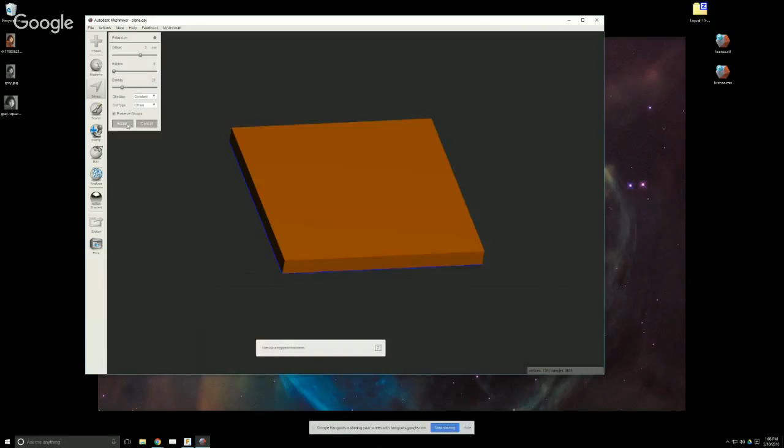So what I want to do is select the whole thing and extrude it out a little bit. If I press W, we don't have very many triangles here. I go over this in the Meshmixer class, but I'm essentially going to remesh this maybe a couple of times to make it really, really dense. The whole point of this is to make a very dense mesh to start off with, which will then have the picture pop out of it.

So I remesh this a couple of times, so that's a pretty dense mesh. That's nice. So we're going to go into here to sculpt, to surface, and let me get rid of these other ones that I did. So we're going to go down here to sculpt, to surface, to stencils, and press the plus button right here, and navigate to where I saved this, and I'm going to select the gray square.

So now in stencils, we can go and click on this image. I'm going to make my brush bigger. And I'm going to go to maybe draw 3 like this, turn down strength a little bit, and click and see what happens.

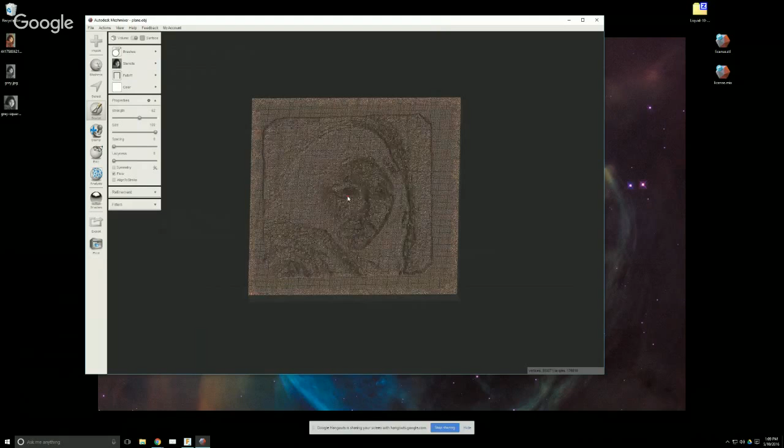If I turn wireframe off, you can see that from the front, that is kind of the girl. And if we zoom in here, you can see that it is kind of bumpy right here, but it is definitely the girl when we look face on. I'm going to undo that and go back in.

Under refinement here, I have reduction turned down. I could reduce it a little bit if I don't want that much smoothing, and then try this again, and kind of pop her out like that.

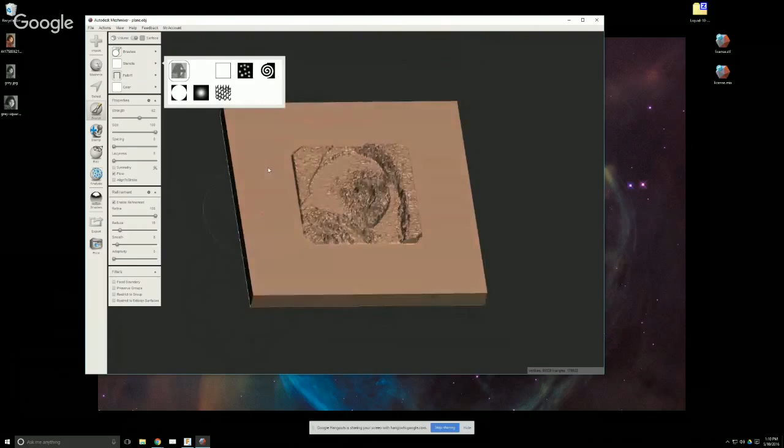So that is definitely 3D printable, except some of these things might be pretty small, right? These little spires. But this is definitely something you can use to create all sorts of different patterns on your mesh. If we make this smaller, we might be able to see the detail a little bit more. Right, her eyes are kind of popping out.

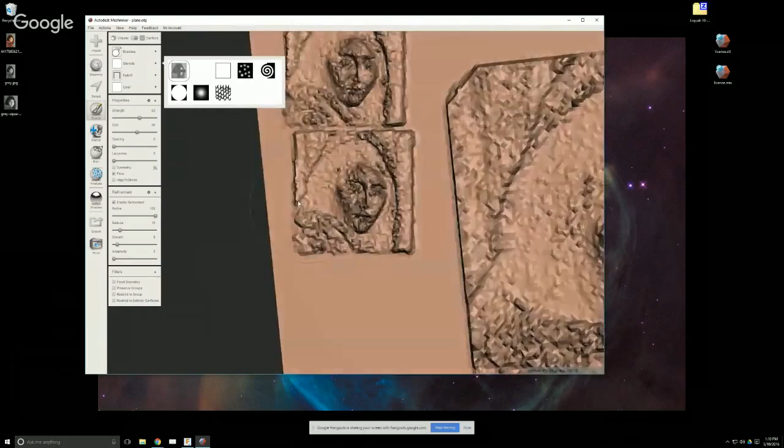So what this is, if you remember this square right here, let me drag this over, you can see that her hair is dark and her eyes are white. So in this, everything that is dark is staying down and everything that is light is popping out. If we do this stencil, you can see that it's dark on the right-hand side and light on the left. So when we do this, it comes out following that. The light parts come out, the dark parts stay down.

So that's one way to do it. But this isn't the best way to do it. There's a couple different ways.

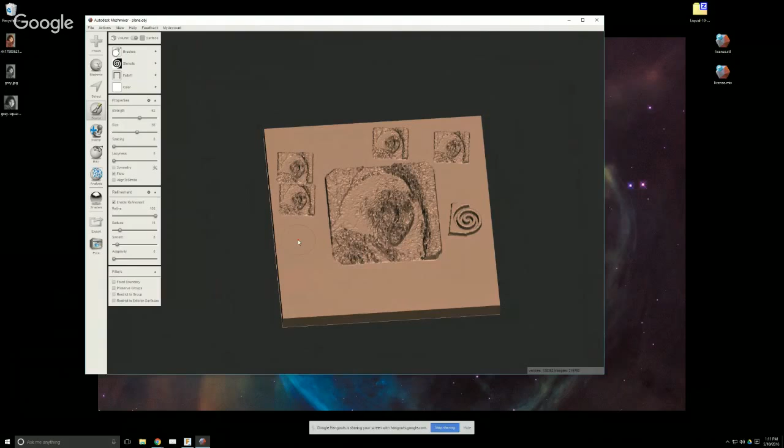If you have a 3D printer, you can open up this free slicer program called Cura that slices 3D models. If you go to File and Load Model, you can actually select an image.

And if you select an image, it asks you how tall you want it to be, 10 millimeters, with a 1 millimeter base, with it to be 99 by 99 millimeters. And maybe do a little bit of smoothing, and we could have a 0.5 millimeter thick base.

You click OK, and then it brings in the image, and it does actually look like a little bit better job than Meshmixer. And this is just a 3D model.

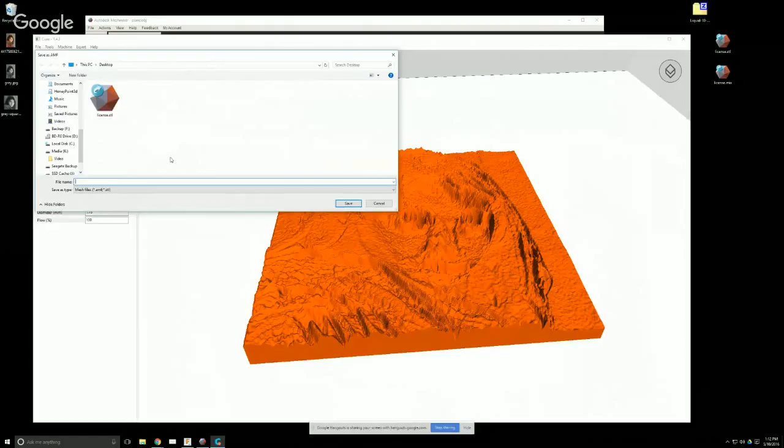So you can say File, save model, and you can save this as greyCura.stl.

After a second, it will load up as a 3D model, and now I'm actually opening it in Meshmixer. Meshmixer will think about it for a little second, and there is the model ready for you to do whatever you want with. Notice that Meshmixer has shown some open boundaries essentially everywhere on here.

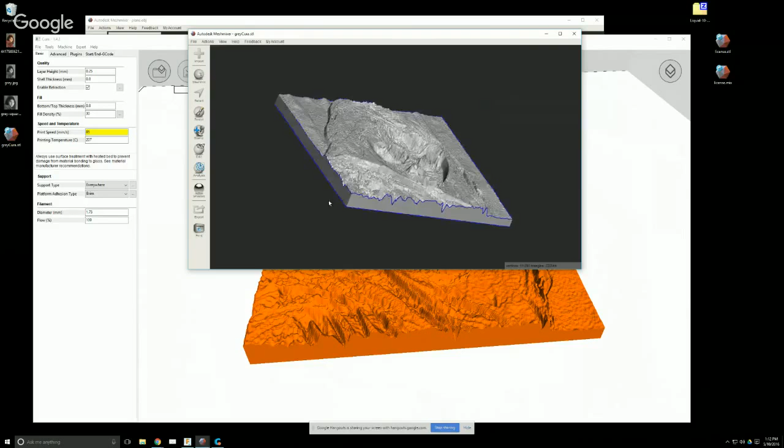So you might need to do a little bit of work to fix that, but it is something that you can edit as well. So that is one way to do it.

Now the last way to do it is to go to a web page. This is a web page called 3dp.rocks, so 3dp.rocks slash Lithophane.

There are lots of different things that you can do inside of here, ring makers, but there's this image to Lithophane converter. You click on this, and you get some options here. If you click up here on images, it asks you to choose a file.

So I'm going to choose maybe the square right here. It thinks about it for a second, and then it creates a Lithophane here in your browser. And you can also do other things, inner curve, outer curve.

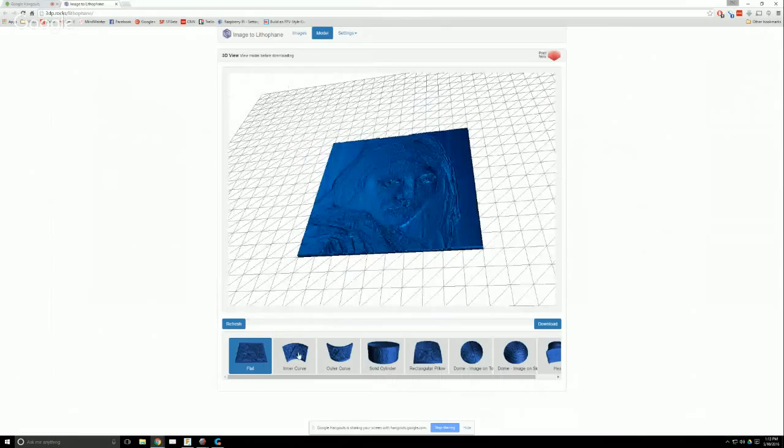So if we click on inner curve and say refresh, it thinks about it and creates a 3D model. And if you say download, it will download it.

And you can open that up in Meshmixer as well, once it comes up after a second here. There we go.

Now, these are probably not optimized for 3D printing. They may not let enough light through for creating something that would be 3D printed, but that is a way to create an image as well. And stop. There we go.

So hopefully that gives you some options on how to use some tools to create a 3D model out of an image. And those are just 3D models. They can be used anywhere for anything, just like any 3D model could.

So the other thing I wanted to talk about today, which is something that happened in my own life, was I needed to hang some stuff up in my garage. And since I own a 3D printer, I thought, well, why don't I just create hangers for things? And so I did. So I want to show you how I created those and how I went about that.

I have some different examples here. These are safety glasses, right? And so I was just hanging these on a nail, but since I'm a 3D printy person, I wanted to hang these on something 3D printed.

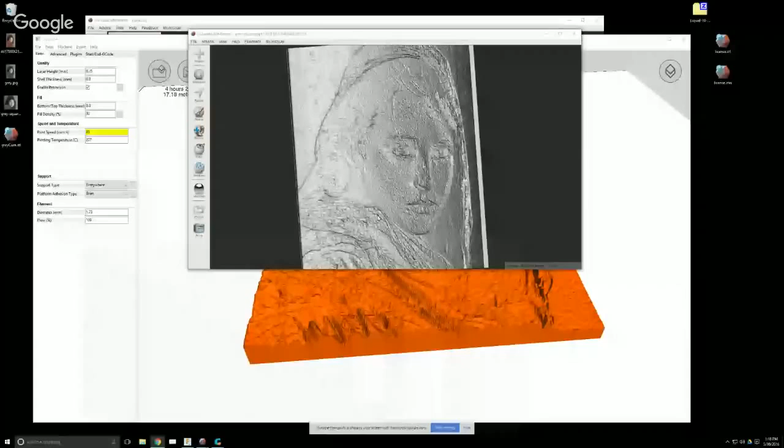Let me share my screen again and show you. So in Meshmixer, let me start with nothing - close all of these Meshmixers down. Meshmixer doesn't allow you to just start with nothing, you have to start with something, so I just imported a bunny, but I'm going to get rid of it later.

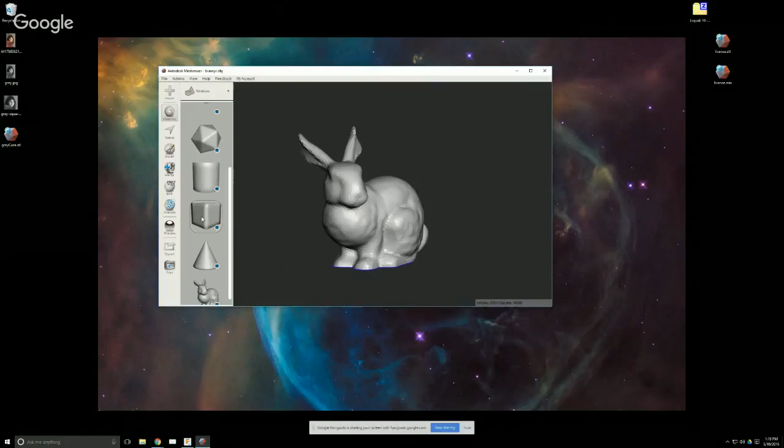I'm going to go to Meshmix, down to a cube, and drag this into open space. Then it asks what size I want. I want this to be 40, and it says it does everything uniform, but that's not what I want - I want 40 by 40 by something around 5 millimeters. I'll say accept, then click on the bunny and click the trash can to get rid of it, and click back on this object. So that's my plate, what I want to create a hook out of.

This was as simple as going to the sculpt tool, to a draw brush, making sure all my settings - refinement and reduction - are all the way up, then starting to click and draw outwards. If you hold this down, flow is turned on, and it's building outwards. I'm going to hold it down until it looks proportionally correct.

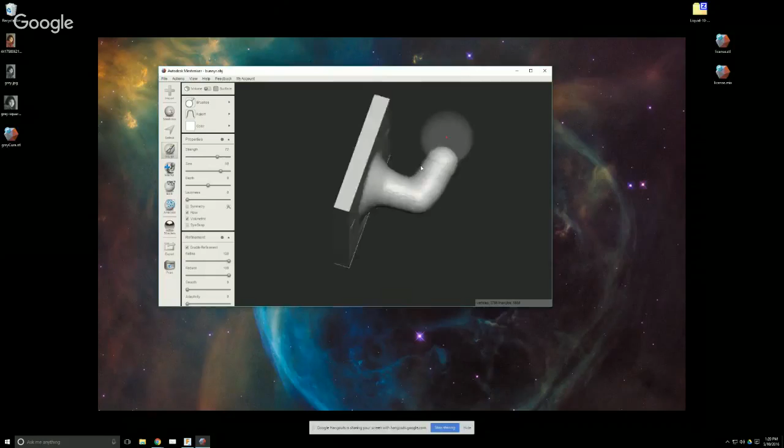Now I'm going to go up a little bit like that. If that isn't too good, you can hold down the control key and it undraws, so it goes down and you can keep refining it that way until you get what you want. You know this is kind of right because the square is 40 by 40, so proportionally that looks correct.

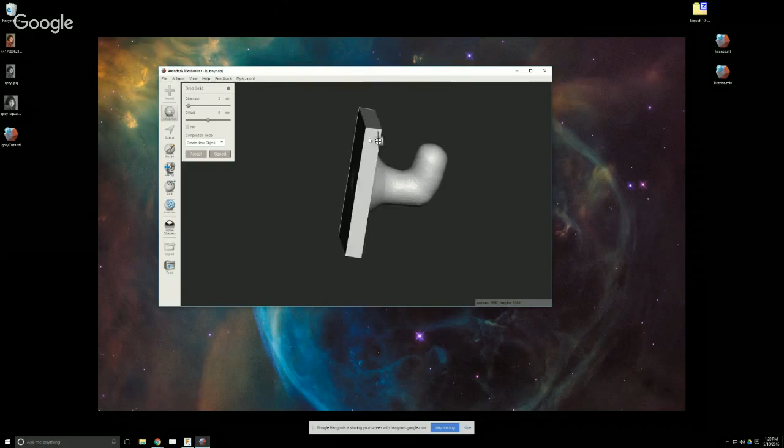We can go to Meshmix, and this is a cylinder. We can drag a cylinder onto the model and set the dimension to make it around 3 millimeters or so. It's a little tiny bit off, so you can drag this around and then say accept, and transform this - I'm going to make it much bigger so it cuts all the way through my object.

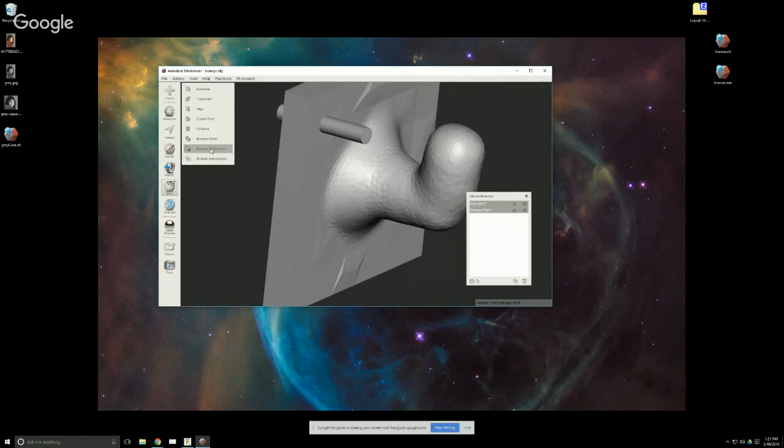Select my object, select the cutting tool, and do a Boolean difference. I would have done a little more remeshing on this if I were doing it for real, but that's the workflow. That cut a hole through the plate for a screw to go through later. So that's just a quick overview of how to use Meshmixer to create something organic.

Now I want to use another couple of examples in Fusion to show you how I made those two things for the vacuum and for the butane torch, because those are a little more complex, but also pretty useful. Let me share my screen and bring up Fusion here - I think I'll just try sharing the Fusion window if I can do that. There we go, you can see it. Good.

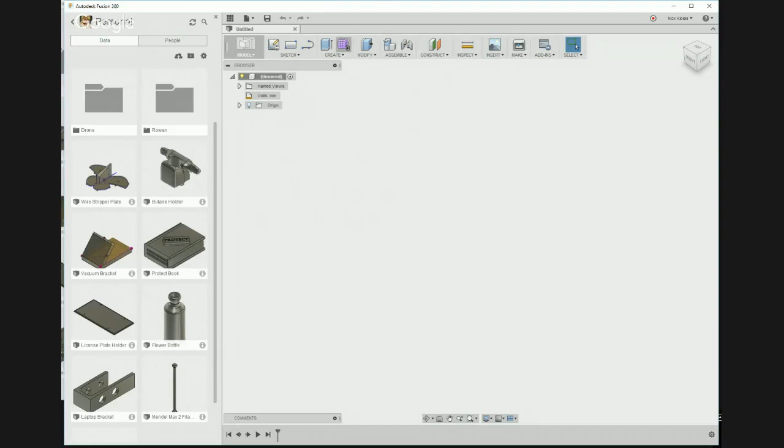So what I did to create the vacuum bracket, you can do this a couple of ways. Certainly the easiest way is to create a sketch and then just draw the bracket. You can do this any way you want. Say the bracket needs to be these dimensions on the wall, and then even with a line you can say the bracket needs to come up here at this angle and then come down.

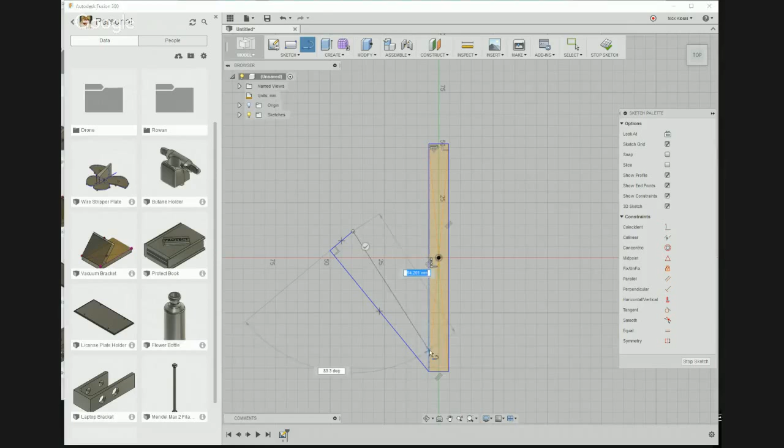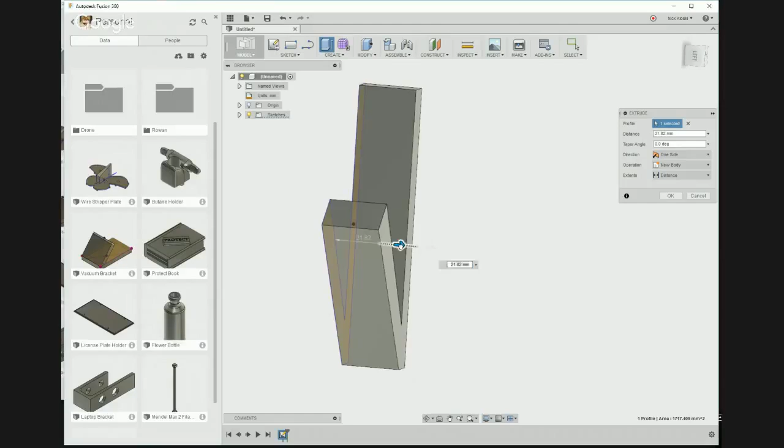If you want to be real fancy, you could go in and sketch and trim this little line in here, like that. So now you have a bracket like this, and you just right click on it and say extrude. This would match what angle you'd need to go into your vacuum that you measured. So that's certainly one way to do it, but I want to show a different way how I did it.

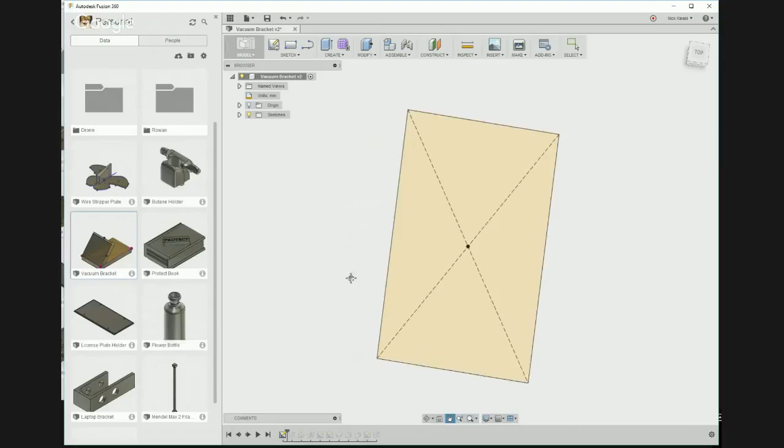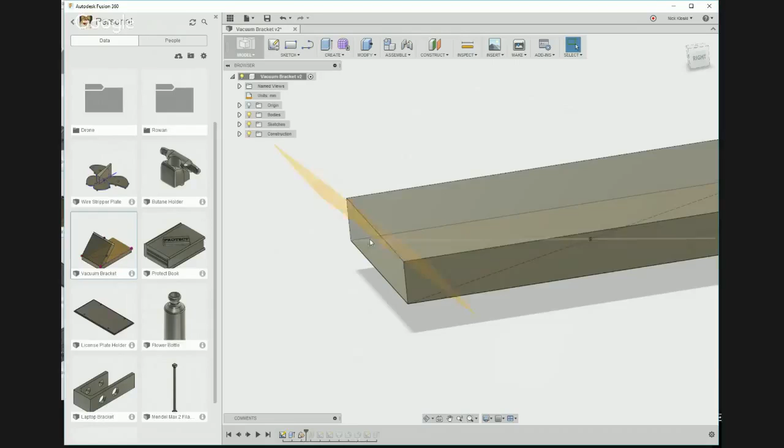I'll load up the vacuum bracket here. First I started with what I wanted to go on the wall, and next I extruded that out. So I started with a sketch and then extruded it out. Then I created a plane at an angle. I knew I wanted this to end up somewhere over here, so I used this edge down here and went to construct plane at angle. I made this plane at a specific angle that I thought would work.

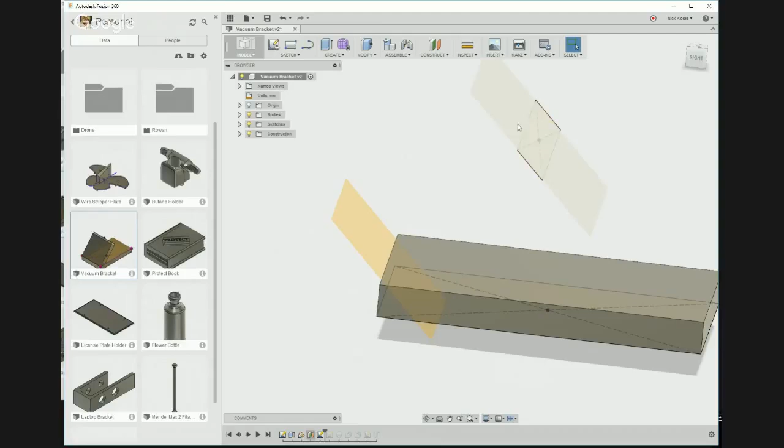And then I created an offset plane from this plane, so I moved this plane out. I drew the end result on this plane, what the end of the bracket would be. I drew a square on the bottom of this bracket, the bottom of the wall plate. And then I did a loft, I lofted those two things together. And then I added some other nice things like little fillets down here to make it a bit stronger of a material.

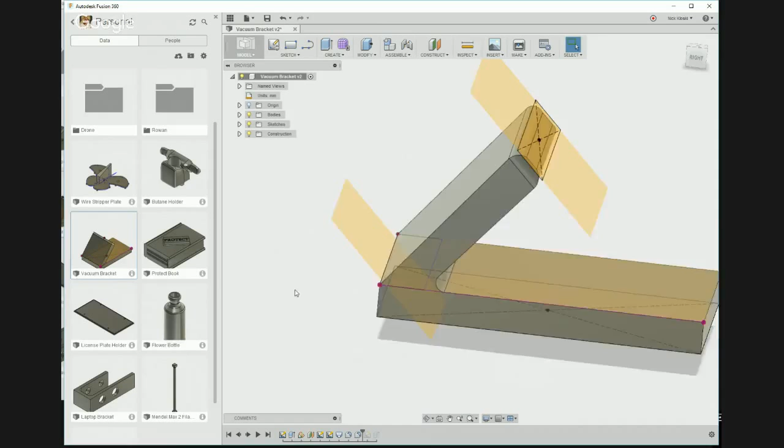And then up here to make it a little bit nicer. Now, the reason I did that was if I wanted to have some sort of swooping transition, you can do that with a loft. You can loft from this plane to another plane to another plane to this plane if you wanted, and have it kind of be nice and wavy if you wanted to. You could certainly do this with just a side profile sketch, but I wanted to figure out how to do this with lofting, which is why I did it that way.

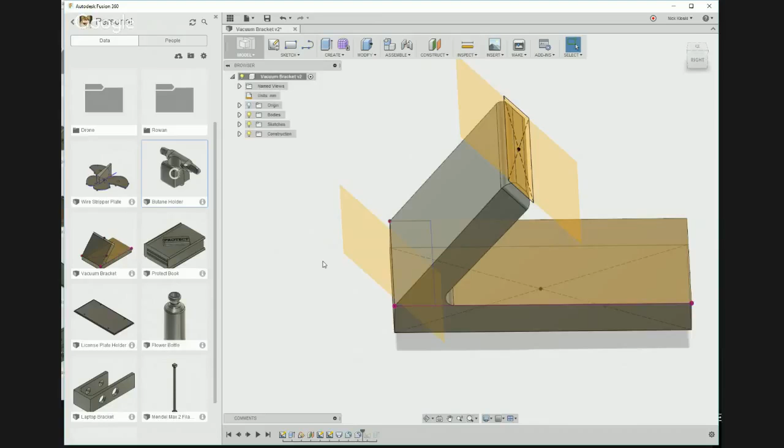So let's go into the butane holder, which was the torch. Let this load up for a second here. There we go, I'll get rid of the vacuum bracket. So this was the torch holder.

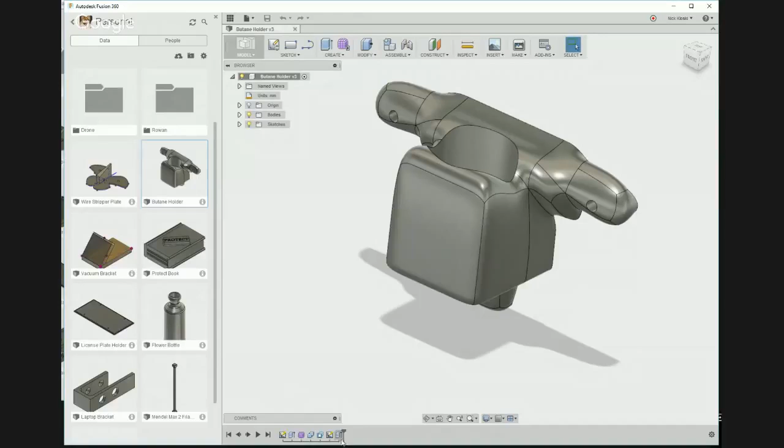So I'll go back and share my screen. That's what I did here. I started off with let me go back to the beginning. I started off with a sketch, so this is the shape, this is an ellipse, the shape of the butane torch. I then extruded that out. I don't need to make it look like the torch because all I care about is the shaft of it, the part that will be cut out of the other object to the length that I want.

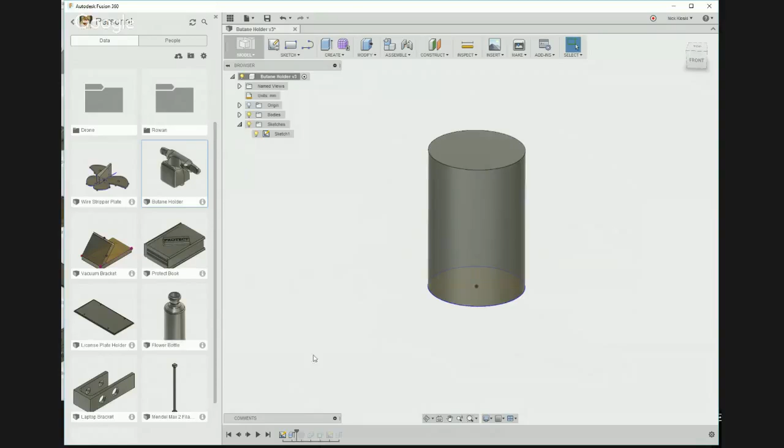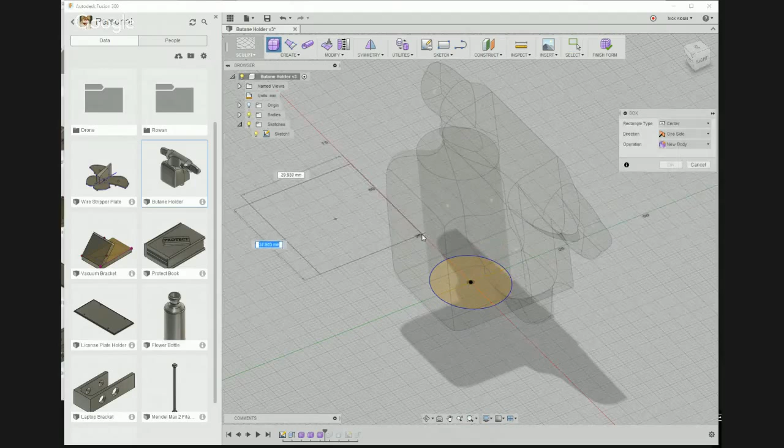And then I went in and created an object in the sculpt environment. I just started off with a box, kind of like a finished form. Let me create a box. I started with something that was vaguely the size that I wanted and tall, and made it a little bit more defined. Best practice with this is to always have an even number of faces, because that gives you a line in the center across which to mirror. If we went one more, you see there's no real line here and the mirroring gets kind of weird. So, something like that.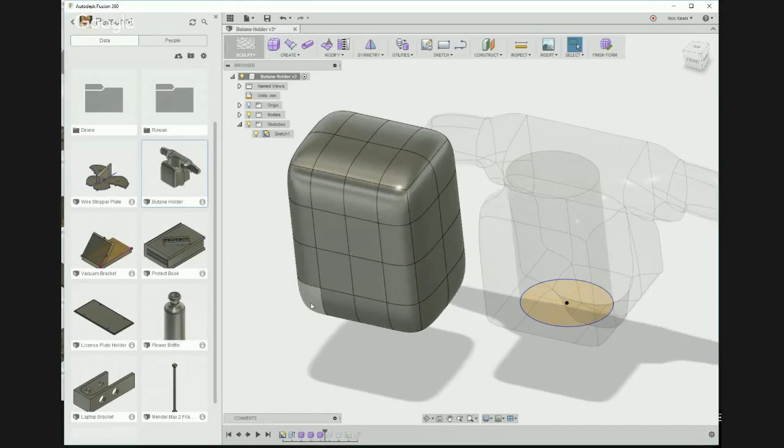And of course, this would be on top of that circle, so you'd be able to model to that. But I use the trick of selecting—actually, let me turn on symmetry. I want the left and right to be the same.

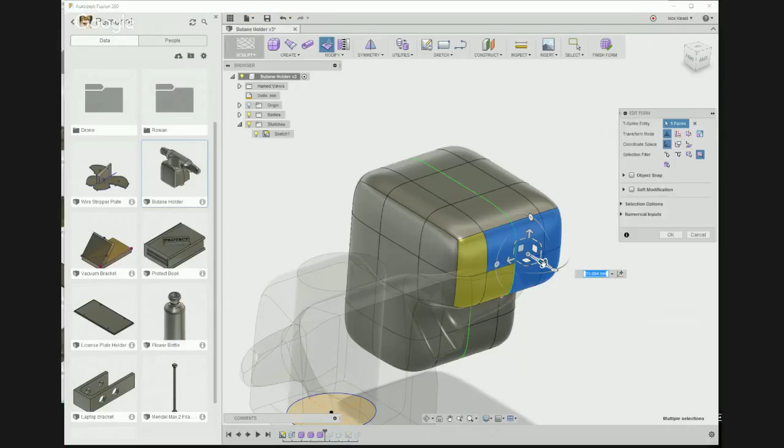So I went into the sketch and selected all of the faces that I wanted to modify, went into edit form, and held down the Alt key. When you hold down Alt and move, it starts a new extrusion out, so you're able to create cool effects like this. If you just pull it, it opens it like this, which you may want. But if you hold down Alt, it creates a new face off of that, and you can hold down Alt again, something like that.

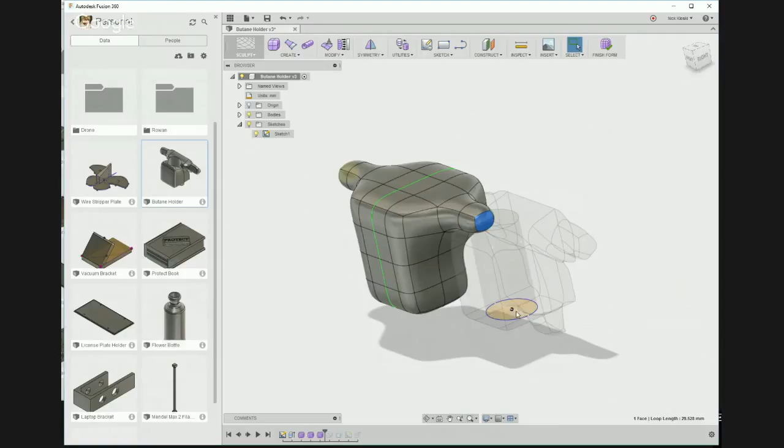So I just went down and created a shape that encompassed this entire cylinder the way that I wanted to. Let me hide this kind of test body that I did. And then I did a combine with cut—so I had this cylinder inside of here, and I cut that cylinder out of the body.

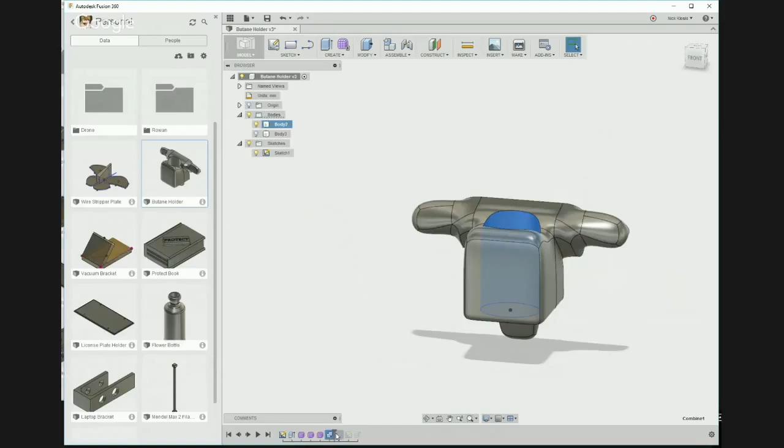And then here's something I did too: I said offset faces. This was a perfect match to the butane holder, and I don't want that—I want it to be a little bit bigger. So I could go into the sketch and change it, but sometimes you want the sketch to be perfectly what you're modeling in the butane holder.

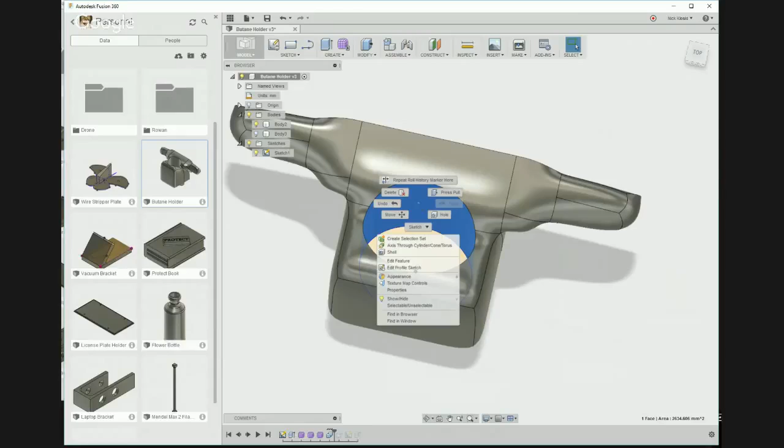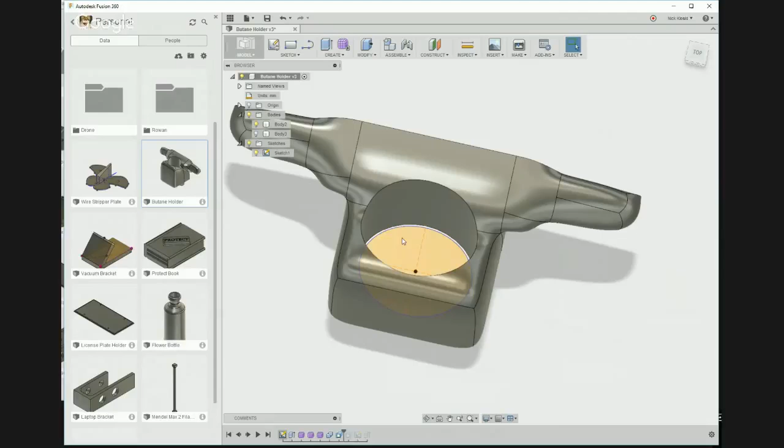So I just clicked on this, right-clicked on the side of this shaft, and said press pull. That allows you to make things a little bit bigger or smaller. So I made this a tiny bit bigger, maybe 0.3 millimeters around, a little bit larger, so that when I 3D printed this I would have a little bit more room. Then I just did the other little cuts.

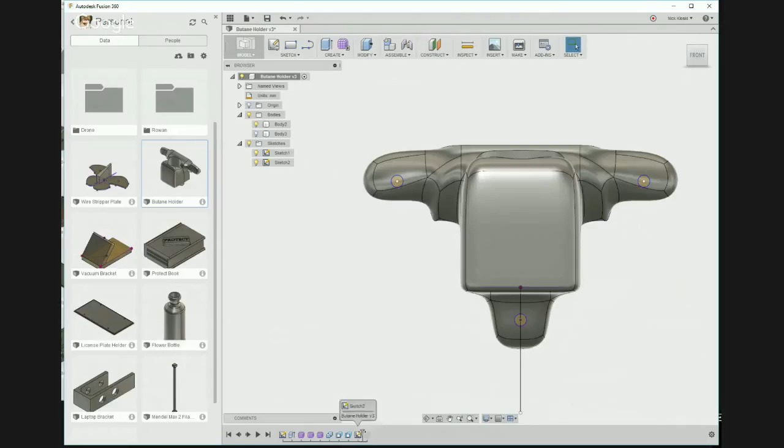What I did here was look at the sketch from the front. I created a sketch right here of these 3 holes for the screws, and then extruded those out to cut, essentially by selecting them, right-clicking on them, and saying extrude.

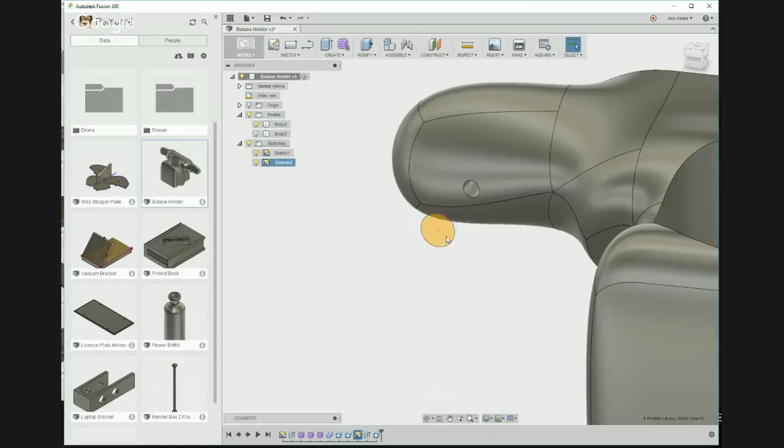And then as you drag them in—well, here, I'll show you. I can press pull this one to make it smaller. Now when I extrude this, it creates until it hits something, and then it says, oh, you probably want to start cutting now, so then it cut. I did that for all 3 of those holes to create the screw holes.

And that is how I created the butane holder. Then all of those mounted on my wall, and I have some really awesome things. You notice that you don't have to create things that look like this—just a little hook totally works and is nice, but this butane holder is really nice looking.

It has these weird little bevels on it, if I can show it, that are part of that T-spline sculpt shape. It's a really interesting shape, and it looks beautiful on my wall, and it fits super duper perfectly with this butane holder. If I go back, I want to show you just one more here in Fusion.

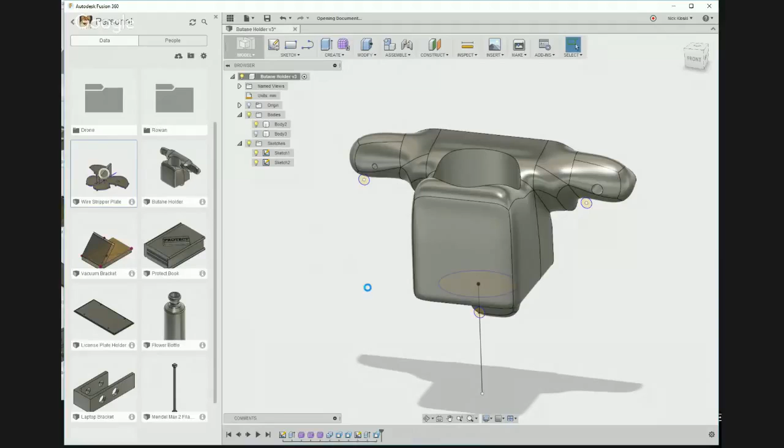I created a little mounting block for some automatic wire strippers, where you just put the wire inside and it automatically strips it for you. It's like black magic.

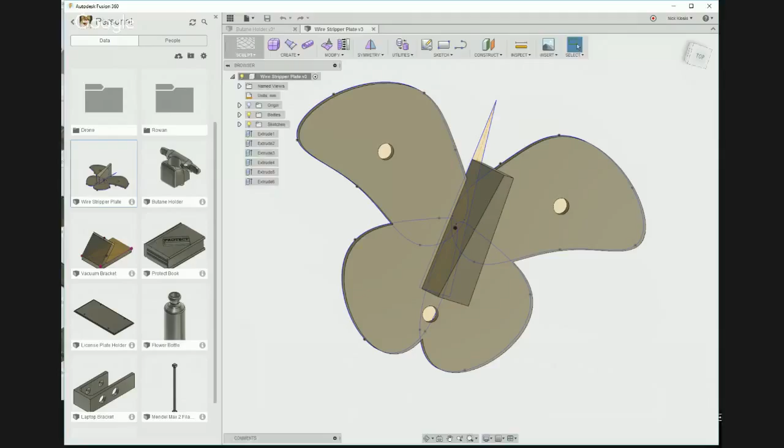So this is kind of a triangular or trapezoidal shape. Right here is what holds the strippers on the wall, but I created kind of a little butterfly shape around it because I just wanted it to look pretty on my wall. Like, why not? That's the real awesome thing about 3D printing—you can create anything.

So if you're going to create anything, you can certainly create things that are utilitarian, but if it just takes a couple more minutes to create something beautiful, why not, right? That's what 3D printing is about—unlocking your creativity and learning the tools, so that a couple little brushes, or going into Fusion and doing a bit of work in T-splines, suddenly gives you something that beautifies your environment. Why not? That's what 3D printing is for.

So that's one of the things I really wanted to go over in our tutorial today: how to use these tools from a strategy perspective, using measurements to get to certain places. But then once you're done with that, why not look and see how you can make it pretty, or make it something that makes your environment happy and more alive than just utilitarian.